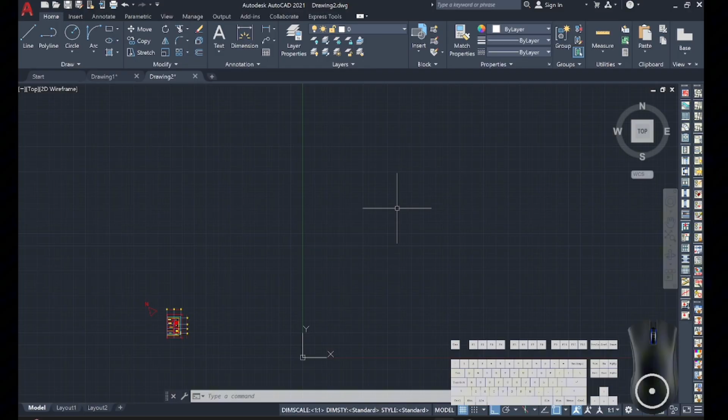Some of the things still unknown to some students is the explode command. So how do we utilize the explode command? First, if you make an object that comes from a block or a group, and you want it to be edited individually, something like that.

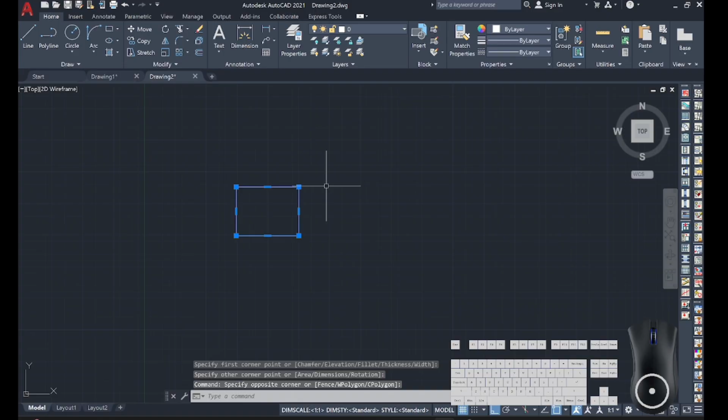For example, I'll make a rectangle. In a rectangle, we can say it's all connected with each other. But what if from the rectangle, you need to make a wall, or just one side of the rectangle needs an offset, something like that.

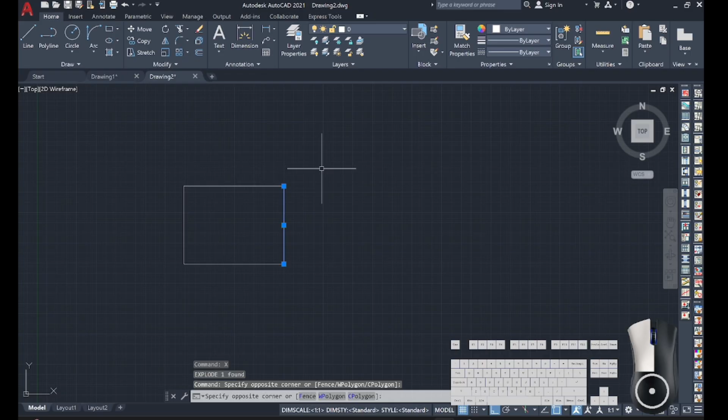What you need to do is enter explode, or X. So X, when you enter it, it's already exploded, meaning it's already an individual object or individual line.

Next, how do we use wblocking? For example, you have a fixture and you want to retain and utilize it for future plans. Let's say I'll make a urinal.

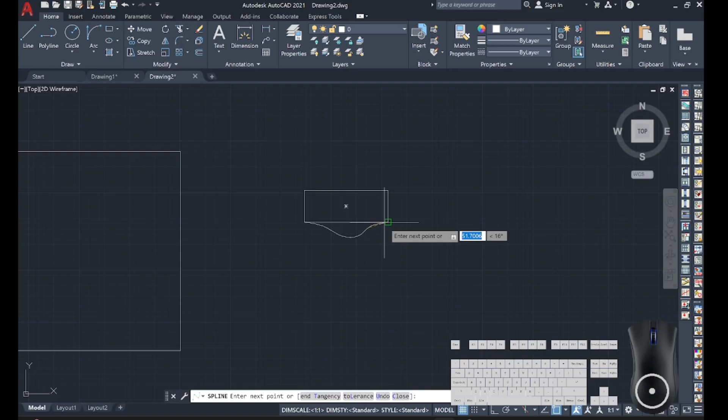Let's say this is the urinal. I will use explode because I will erase this part and then trim. They're still connected, so explode and then trim.

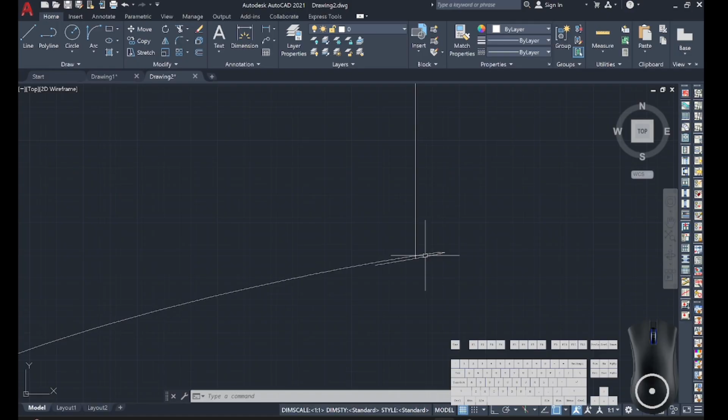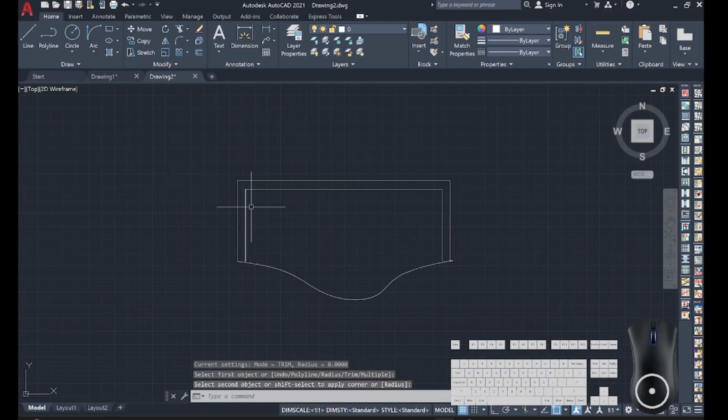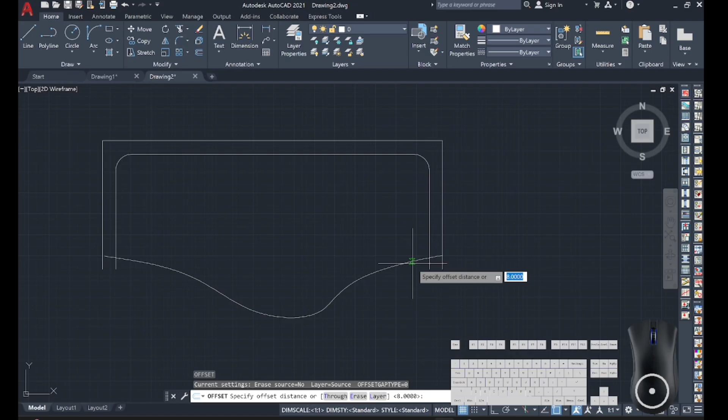Okay, let's say this is a urinal, and I want to retain it. So what I just need to do is select it and then type WB.

WB or wblock, and then the write block dialog will appear. What you need to do is pick a point, enter this, click this, then from the middle, select objects, then space, and you have the option here to insert a unit.

It's either in millimeters, centimeters, or meters. That's what we usually use, but in my case, I will use millimeters. There, it's okay in millimeters.

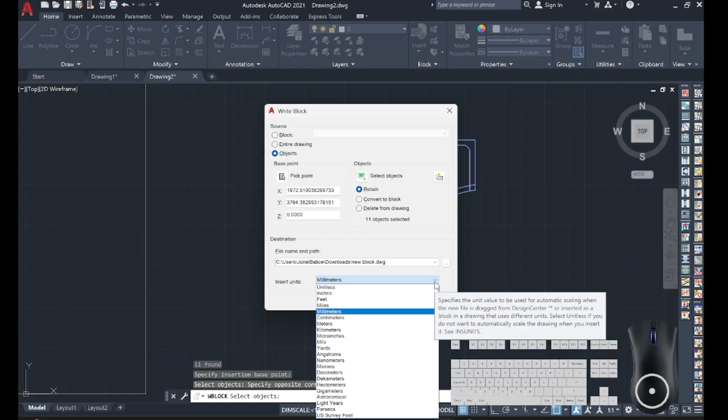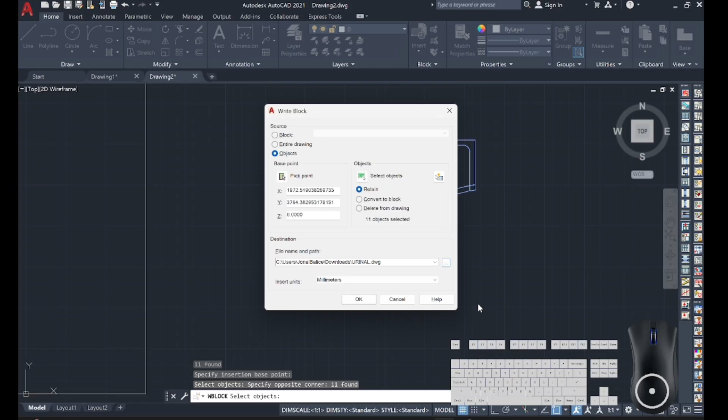Now, where will it be placed? Let's click these three dots, which will go to my downloads. Then I will rename it, let's say urinal, and then save. Okay, and the block is already saved in my file.

So how do I find it? I'll find it here in insert. Insert, then recent blocks, libraries, and then you will see here, it's like a folder.

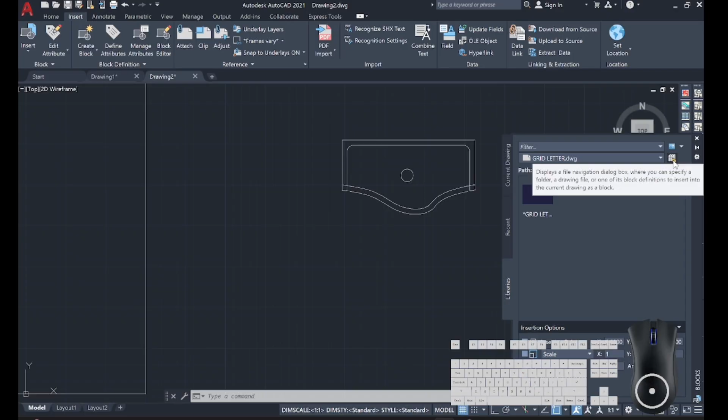Then you just click this and find in your documents, downloads, or wherever you saved it, then click the urinal, and open. Now the urinal is already here. You just need to click it, and then here you have your urinal.

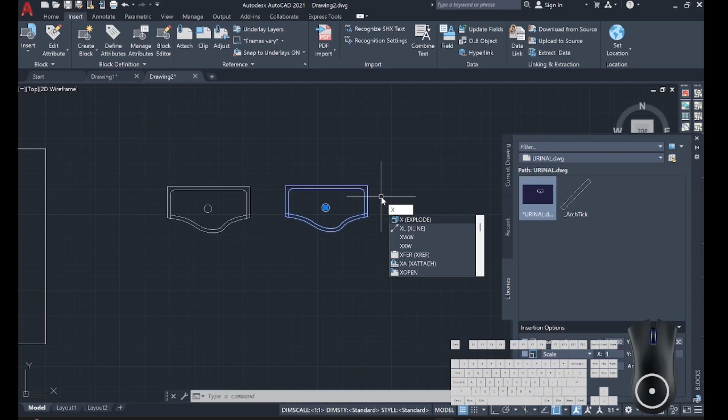But let's say you want to edit it, you want to fix it up more, because it's already like you just rushed it at first, but now you have the time to change it. What you just need to do is enter X, which is what I taught earlier, explode. There, you can already change it or edit it out. You can also delete it.

Aside from that, we also have tools used in AutoCAD that you might be wondering how to make it easier. Like, you want to make tagging, and you also want to make the elevation symbol, or let's say you want the termination symbol. What you just need to do is go to view.

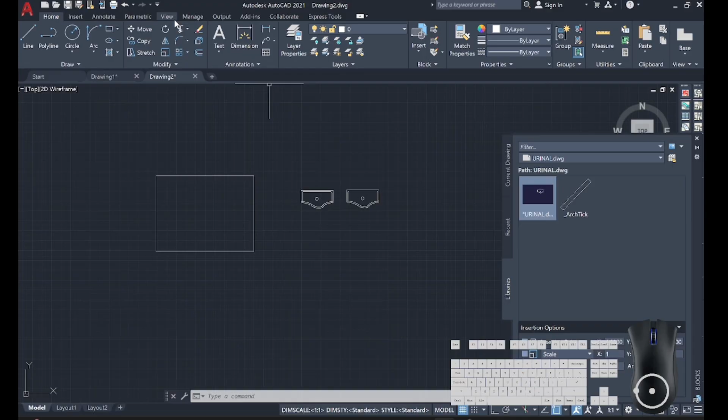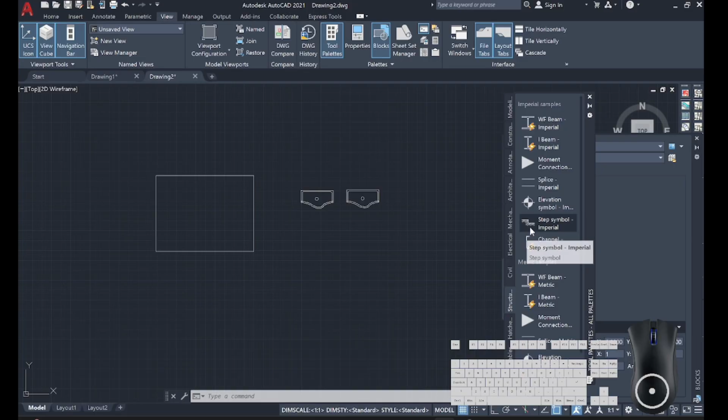Look for tool palettes, and here you will see the different symbols that you might need in your plans. Let's say I need the termination for my step in toilet and bath. So here, I will enter the step amount, let's say 30mm. Okay, if I zoom in, you'll notice you already have your termination symbol at 30mm.

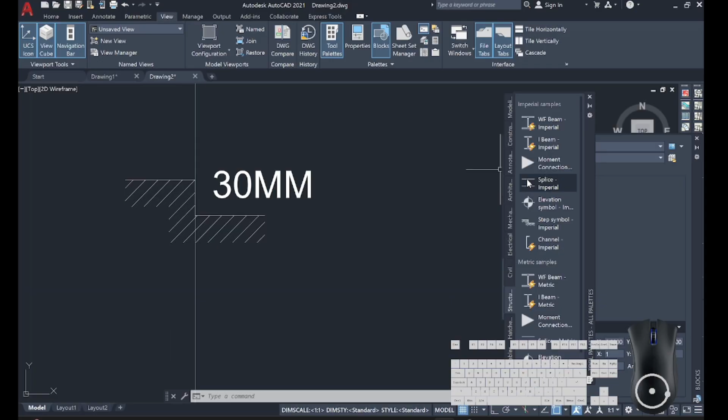What if I need an elevation symbol? Here's your elevation symbol. You have your elev symbol. Let's say, elev roof beam plus 7,000mm. Okay, you already have your elev beam.

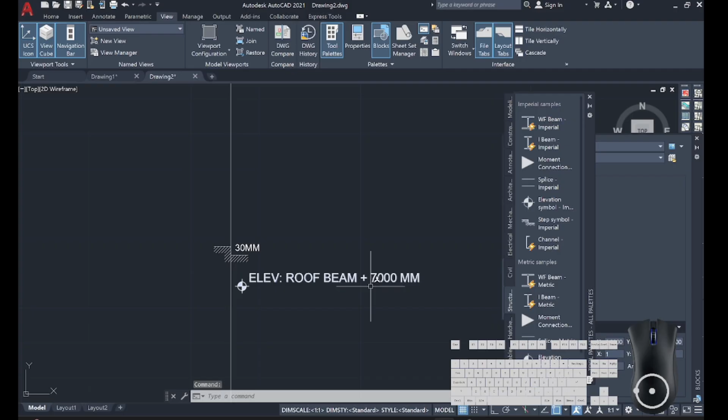What if I need a quick section line? You will go here and annotation, then you choose whichever you want. Let's say, I need this.

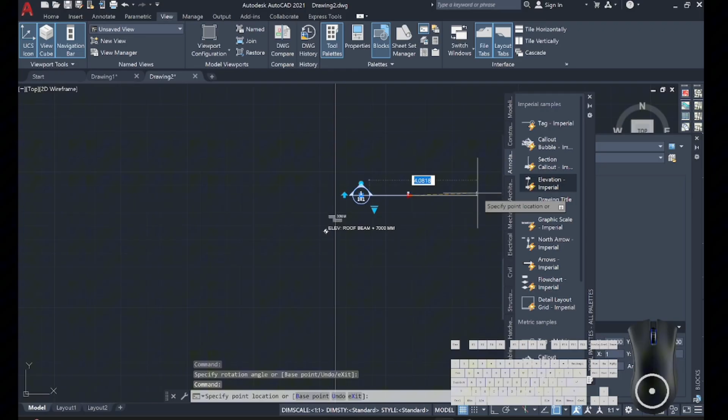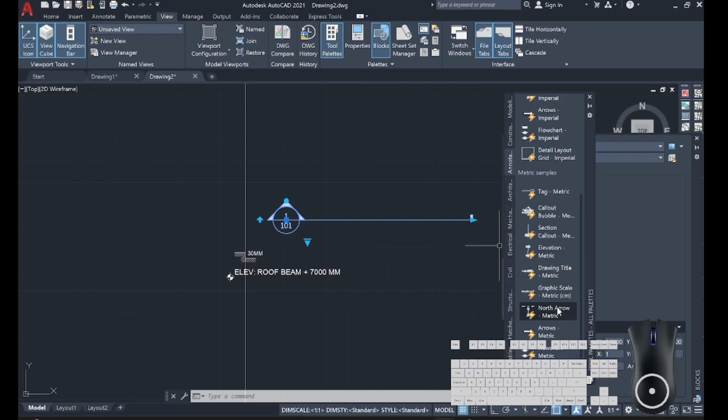What if I need an arrow? There's also a north arrow here. You just need to edit it to whichever you want to replace. This is basically an already-done template that you can utilize with your plans. So it's already installed in your AutoCAD.

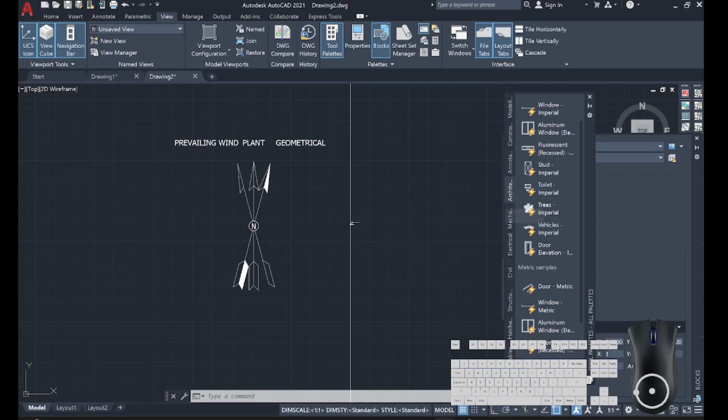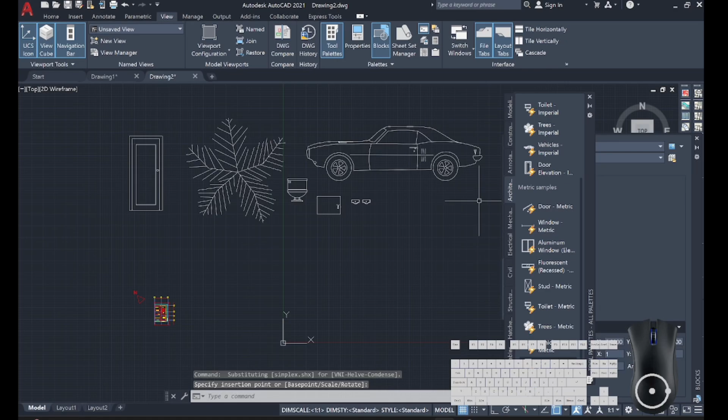Here, there are the architectural symbols, like you can also put the elevation of the toilet here, something like that. The vehicles, you already have the vehicles here. The trees, right there. You have the door, and you just need to resize it so you can utilize it or fit it to your actual need. Also, there are already electrical symbols, the civil symbols, right here, parking. There's already parking here, you just need to place the triangle symbol. It's basically a block that's already downloaded into your CAD. But if there's none in your AutoCAD, possibly the file, storage, or inputs from what you downloaded are incomplete.

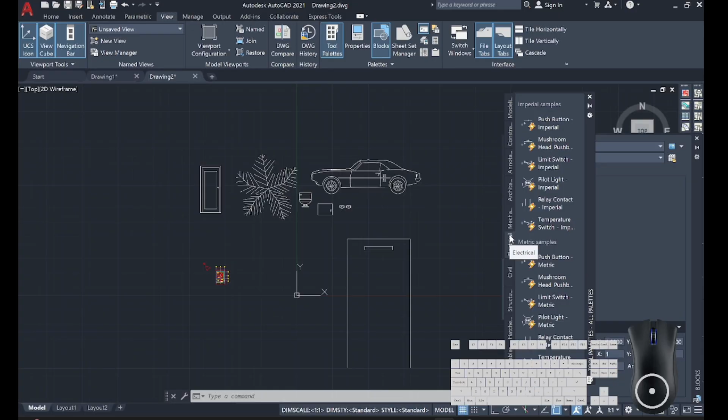Aside from that, let's say some of my classmates, or others I see, need a leader line for their elevation, but some of them do it manually. Here's the way, or where you can find it.

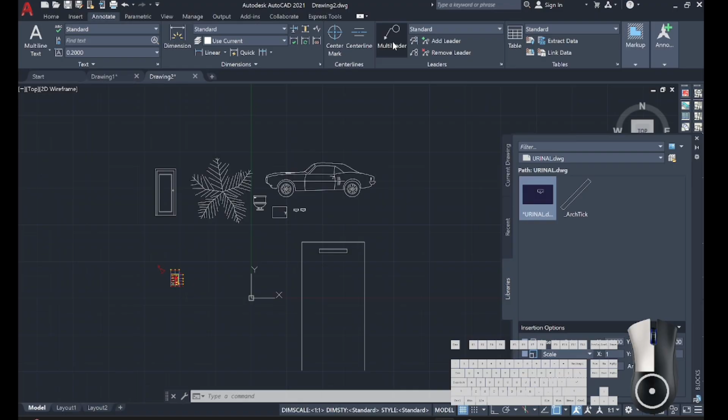You will go to Annotate, then click Multi-leader. And then here, let's say the material is glossy painted in red, painted like that, glossy painted red. And now, you're questioning, why is it so small?

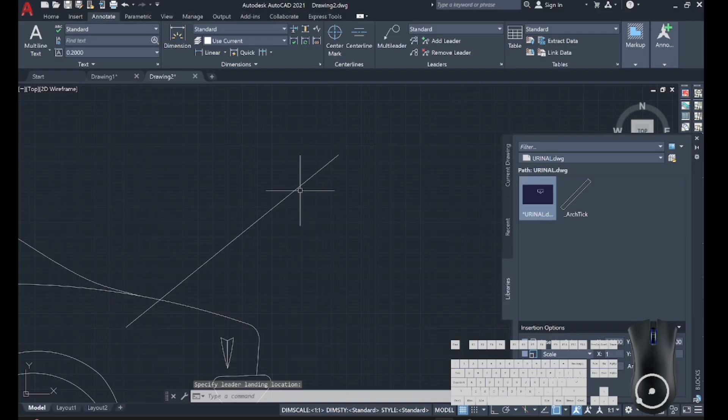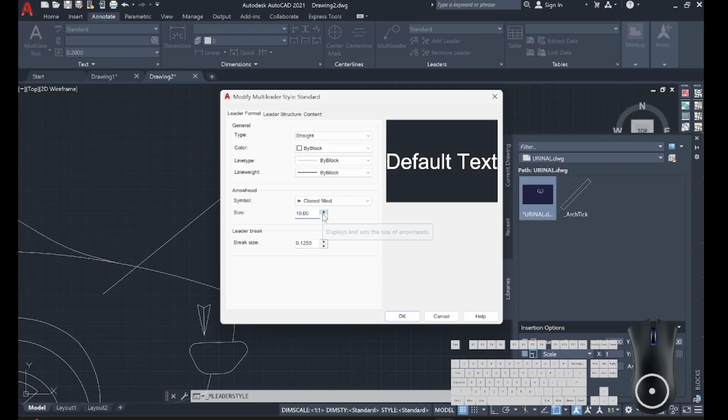You need to make it bigger. We'll just go to Manage Multi-leader and then Modify. What you need to change here, if it's too small, is the arrow size, or the leader line, or the arrowhead of your leader line. Let's say this will be 10. Okay, close. There, it got bigger.

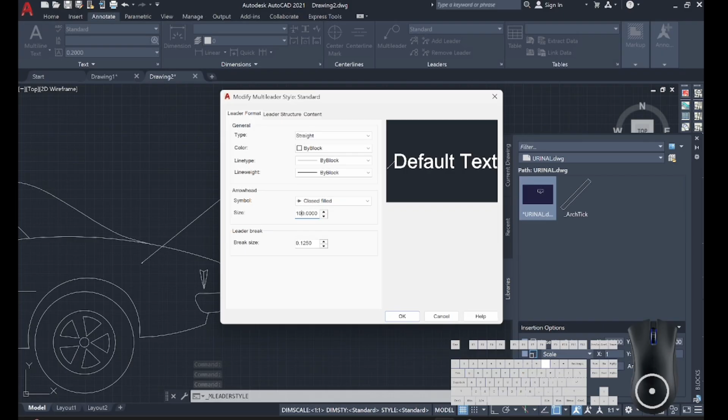But if you zoom out, it's still too small. You just need to go again to Manage Multi-leader Style, Modify, and then make it bigger. Okay, close. There, it's already visible. The arrowhead is already visible.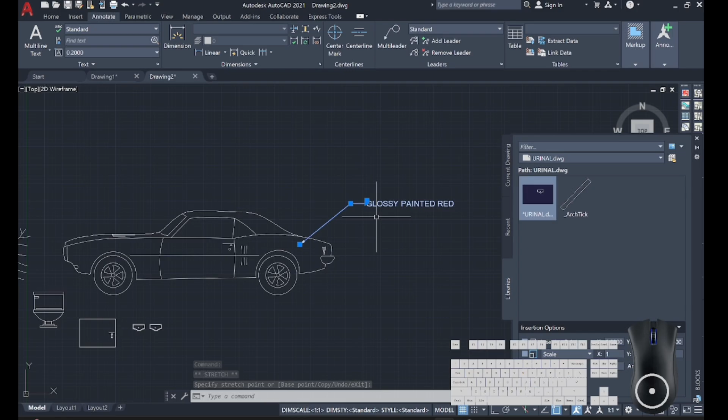So, exploring AutoCAD, there, your leader line is now okay. How about, let's say, you need a center mark for your pipe. Type C for circle, then click the center mark, and there, you have the center mark.

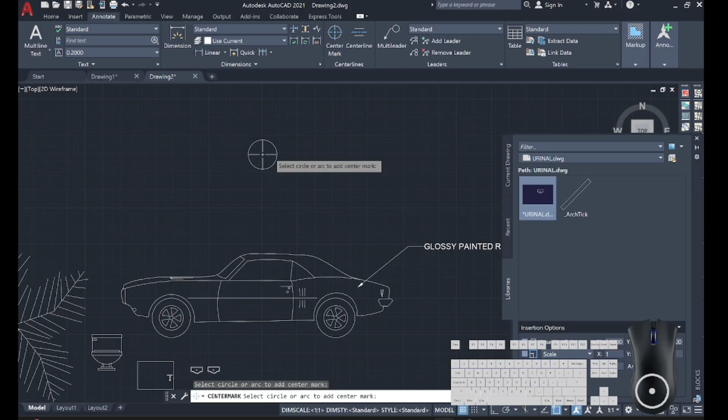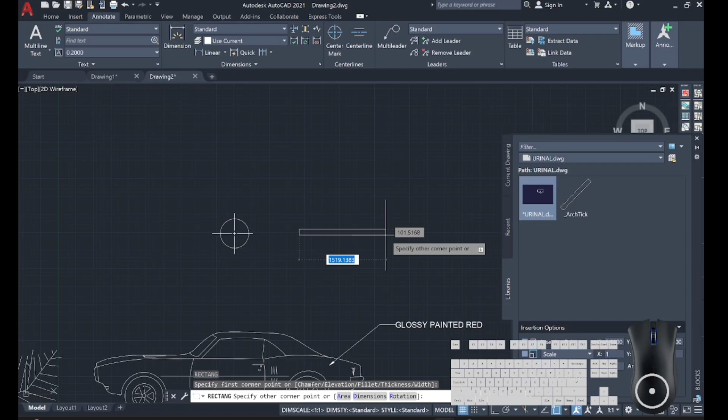But you want it extended, so just drag. There, you have the center line. And if you need it, let's say this is the front, and you also need the side. For the piping, let's say REC, this is your pipe, and then you need the center line. Just click Center Line, then click the first side, and then the second line. And then, there, you have the center line.

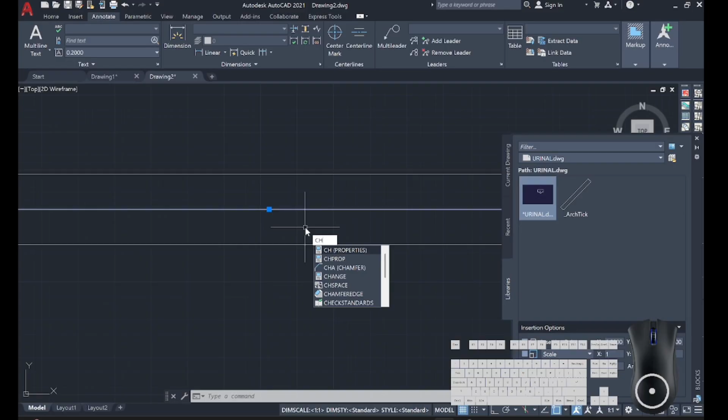But what about this? The phantom line, the line with three dashes, is missing. You will just type the command CH for Properties, Enter, and then you will change the line type scale. Let's say the line type scale is 100. Enter. There, the center line is already visible, which is the phantom line.

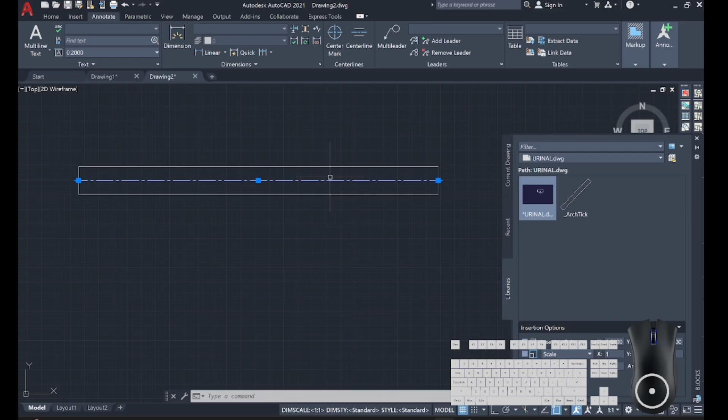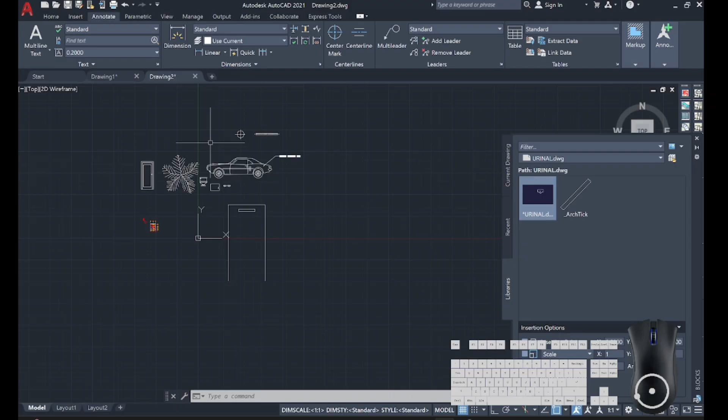And there, you have the center line. How about when you want to dimension quickly? Meaning, you have no time left and you want to dimension it immediately. Let's say this door, you need to dimension every line.

I will just explode it so it can be edited. Say, like this, let's pretend these dimensions are not there. So, what you need to type is the command QDIM, or what we call Quick Dimension. Enter. Click all the lines that you will be measuring. There, you've selected them all.

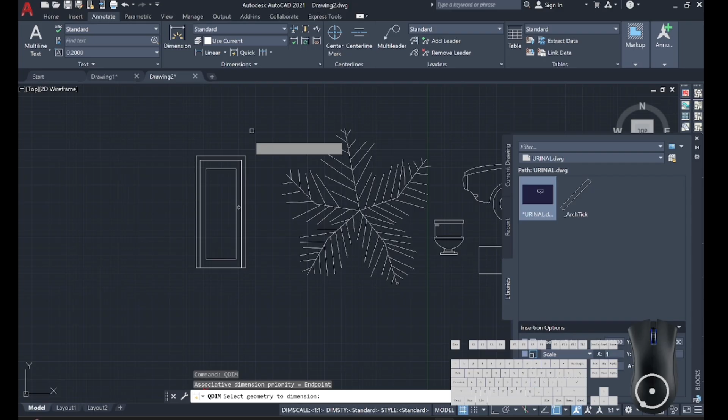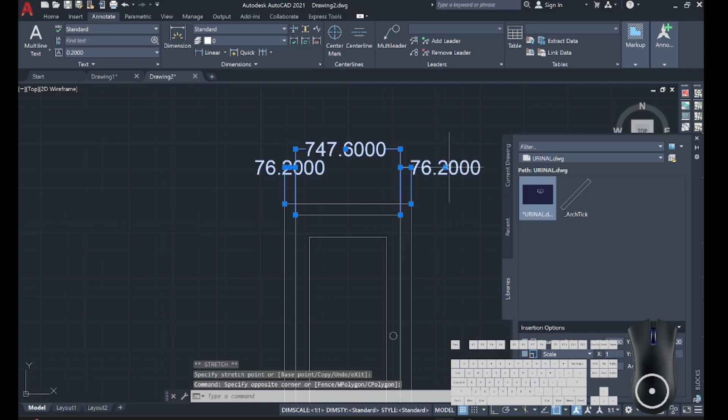So, Enter, then drag up. Then, arrange it quickly. Arrange it here in the middle. And to make it visible since our text is large.

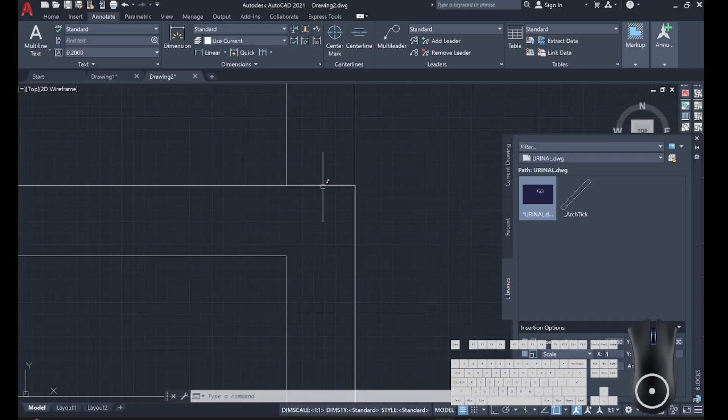Click the arrow, Manage Dimension Styles, go to Modify, and then the Dimension Break. Edit the dimension break, right? Dimension break, yes, it's dimension break.

You need here, 10, arrow size, so it's more visible. 50. 100. Architectural tick, it already has it.

Text, your text height is already fixed. And then offset from dim line, this is for the text, so probably you won't need it. But if you want it on top, aligned with horizontal. This one, ISO standard, align, horizontal.

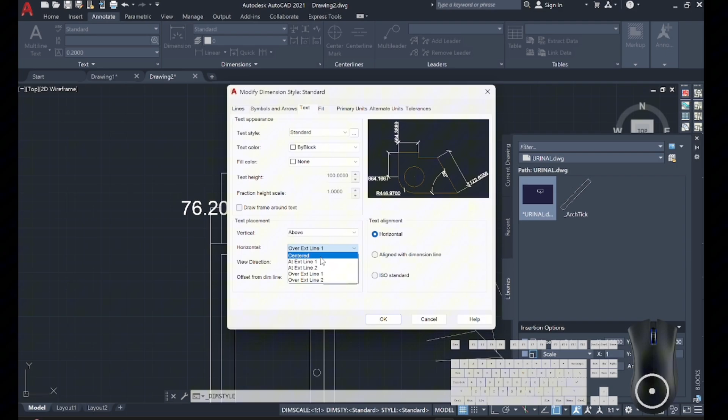But for us, we just need to have the horizontal, the vertical above if you want, and then centered. That's it. And then direction, right to left - probably not, we will use left to right. And then offset from the dim line, 10, which is the distance from your dimension line. Okay, and then the Fit.

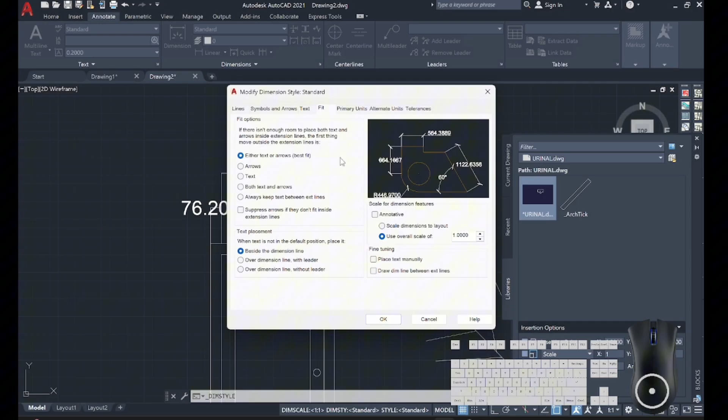You won't change the primary units. Okay, let's say your scale factor - it will depend on what scale you will use. But in terms of this, we'll imagine it's 1:100.

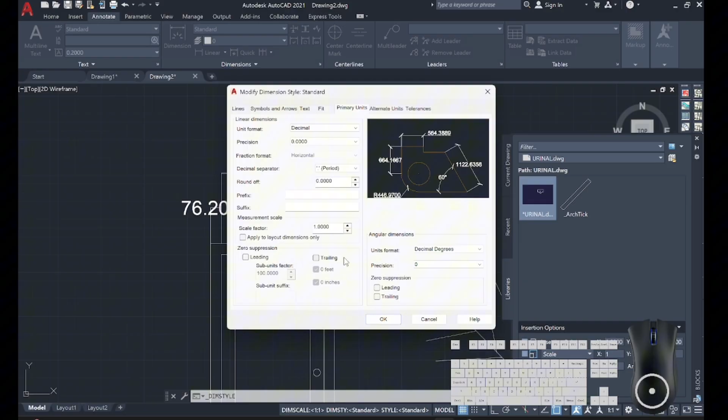So, that's okay. Now, what if you want millimeters, but you're in decimal? What you need to do is set the precision to 0, and the dimension is still in decimal. The round off is there, and how do you want it separated? Since your precision is already 0, there's only one value, it has no decimal, so you don't need this. So, okay, and then close. There, you already changed your dimension line.